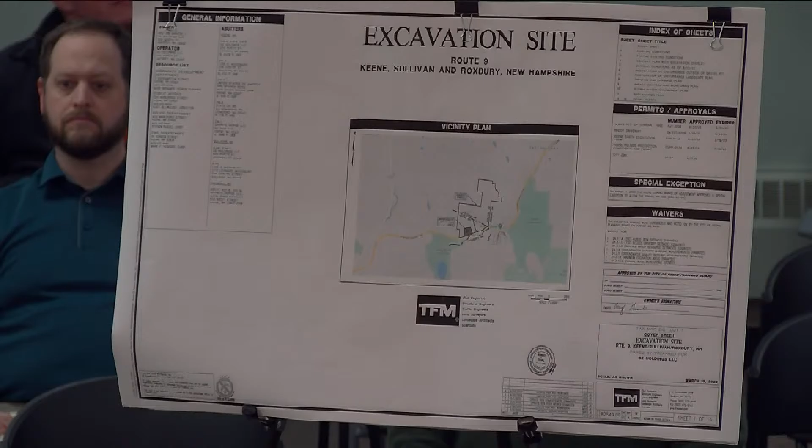They've started, they have a landing area, and they've brought material in from other places to store because it's a nice wide landing area. They're not allowed to remove that material, and rightfully so. They're not allowed to be up there operating. But they have all this material brought in from other sites that they basically can't get at this point. So there's some ability for them to operate their business and allow an engineer to work it out outside of the board. That's kind of what we're requesting tonight and seeing what you guys would be willing to amend.

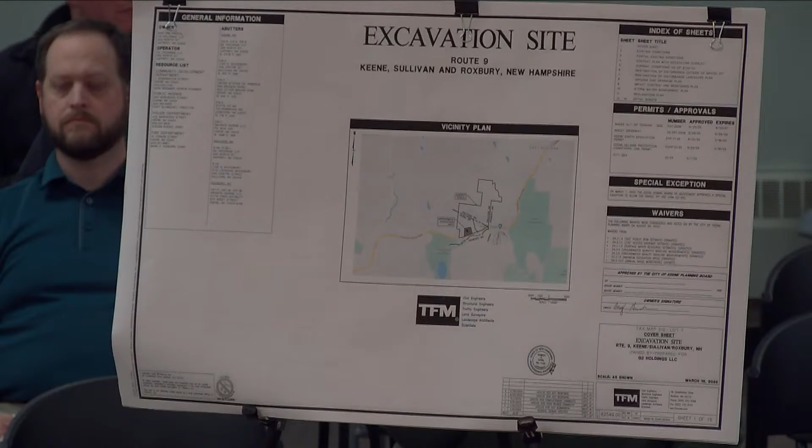Madam Chair, may I interject? Yeah.

Under the planning board's regulations regarding extension requests, an extension is only allowed to be for the plan that was conditionally approved by the board, with no amendments to it. Unfortunately, what's being proposed tonight is not allowed under our regulations. Specifically, it says that no modifications to the approved or conditionally approved plan shall be considered in conjunction with a request to extend the deadline. However, if the applicant wishes to, after receiving the extension, they could come back at a future meeting to request a modification to the approved plan.

Sounds fair. Thank you, Mary. Are you all set with your presentation, both of you?

It would be advantageous to at least know how you felt about that, just so it may prevent us from coming back here, or it may allow us an opportunity to talk about something different. I don't know if this board has the ability tonight to talk openly about the possible amendment and what their concerns may be, or how we could word it. I don't know if staff could weigh in on what their abilities are.

So I would recommend that you keep your discussion tonight just to the extension request, and come back at a later date with the amendment. Thank you. Do any other board members have any questions?

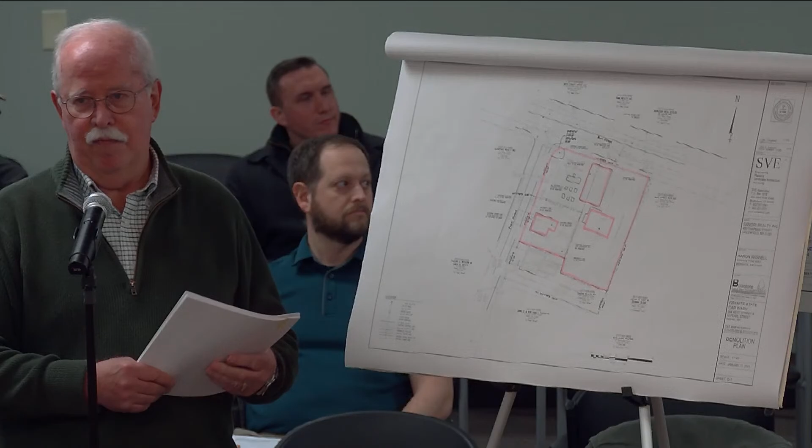This is going to be a good effort to clean it all up. Proposal is to tear down the single-family house, tear down the detailing shop and the canopy, remove the underground storage tanks, which I think most of them have been removed already, and then to merge the two properties. When they merge the two properties, we'll end up with a single lot, 0.61 acres in size, in the Commerce District. And this is just a colored version of the proposed plan that's in your submittal package.

We are proposing to eliminate the existing curb cuts that are pretty wide open all along the West Street frontage. And we would eliminate a curb cut here on Pearl Street, and we're eliminating a curb cut to the single-family residence. We would replace all those curb cuts with a single curb cut on Pearl Street, located about 125 feet back from the intersection with West Street.

We see that as a tremendous improvement safety-wise. You're no longer going to have cars entering and exiting the property at West Street, so that's going to reduce the potential conflicts, especially with left turns crossing 2 or 3 lanes to get in to go to the west. On Pearl Street, by consolidating those 2 curb cuts into one, we'll have a single access point that's much easier to control, much safer to control for the customers who are proposing to use the property.

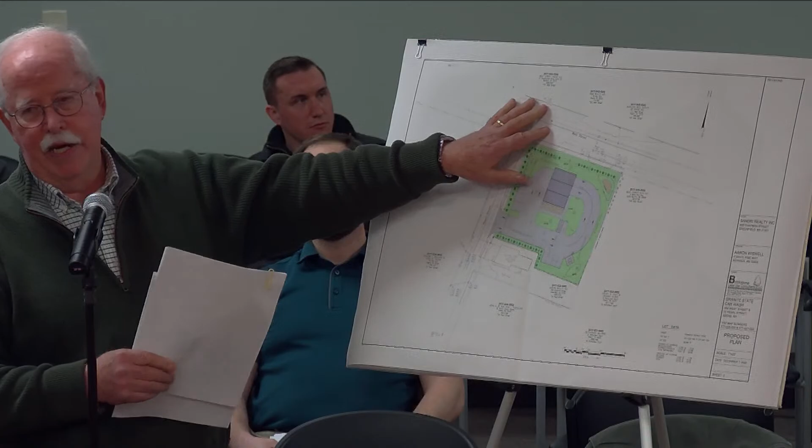So what they determined was the existing intersection today operates at level of service E, and that's no surprise, so it's near failure. Many of the intersections along West Street are that way, and that's what you get when you have the heaviest traveled street in the city. Intersections approaching that end up with long delays during peak hours before they can enter, especially to do left turns. And the longest delay that they measured during their 5-day period was a little over 2 minutes for a car on Pearl Street. It started waiting in a queue, and it was 2 minutes and 5 seconds before it was able to get to West Street and turn left. So that's why that level of service is so low, an E.

We looked at the traffic that would be introduced by a new business at this location, and we didn't subtract or try to balance based on the old gas station use. We looked at this as a vacant lot and a new use, and the number of vehicle trips that would be generated during the peak hours by that use. The numbers aren't high during the week. The highest number of trips generated would be on a Saturday midday when most people aren't working and they can take time to go out to try to wash their cars. They looked at 61 vehicle trips during the peak hour. That means 31 vehicles turning into the site and 30 vehicles leaving. It's not 61 cars, it's really half of that number.

So the car wash technology has changed tremendously, even in the last 5 years. I've done a lot of car wash site plans, most recently Mint Car Wash down on Lower Winchester Street that I think you're familiar with and may recall. They now can wash a car in about 4.5 minutes, which is much faster than it used to be in the old days.

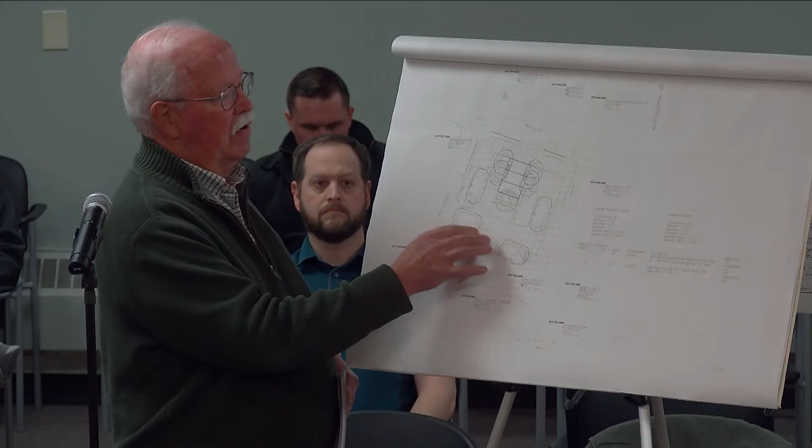We're proposing 4 overhead lights that would be located on 15-foot poles, so they're not really high, like a lot of commercial shopping centers, for example. Most of those light poles we use are 30 feet high. These are 15 feet high. And we are using very low wattage LED fixtures. Because of that, we end up with really low light levels.

When we do a lighting plan, I work with a lighting engineer out of Manchester, Ken Sweeney is his name. If we have a lot of pedestrian activity on a commercial site, then we end up with higher light levels because of pedestrian safety. If they have to step over a curb or go up steps to get into a building, you want adequate light. And it's a liability issue for property owners to make sure we're addressing light levels appropriately.

So here, because you arrive in your car, you stay in your car to get through the car wash tunnel, you may exit your car where we have the 2 vacuum stations located. But other than that, you're back in your car the whole time. So we can live with much lower light levels.

The average light levels that we're proposing here, instead of 4 or 5 foot candles, we're proposing light levels of 1.12 foot candles and 1.32 foot candles at the vacuum station where they're getting in and out of their cars. So it's already a very low light level. And I don't know how many of you are familiar with foot candle readings. For example, in this room, I'm gonna guess the lighting levels are probably 30 foot candles under these lights.

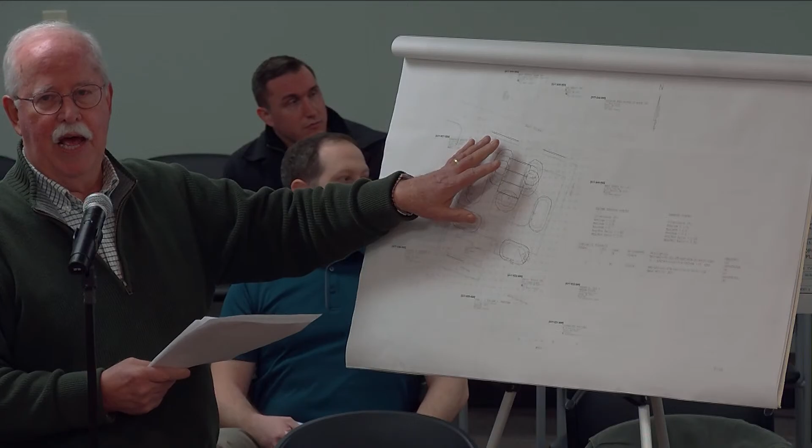Your regulations, this is proposed to operate 24 hours a day. And because of that, we have to leave the lights on. And we purposely created the low light levels, as I explained to you. Your regulations say if you're a 24-hour business, we want you to reduce the light levels by 50% after 10 o'clock at night. And we do not feel that that's safe or reasonable because we're already down very close to 1 foot candle. To reduce it to a half a foot candle, I think is unreasonable and causes an undue risk for the property owner and tremendously increases his liability.

A lot of the properties that I've worked on, I've helped to manage for about 15 years through a property management company. And there's repeated lawsuits on commercial properties over the years, and we learned the hard way. And most of that involved slip and falls or tripping on the property. And it always came back to, was there adequate lighting at the areas where they were stepping down? Is that what contributed to the slip and fall? And regardless of how hard I argued that we had an approved plan that met the Illuminating Engineering Society guidelines for lighting, the insurance companies always settled.

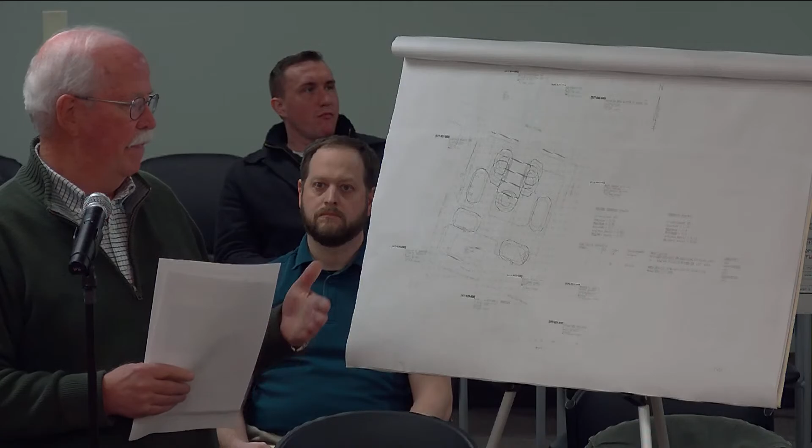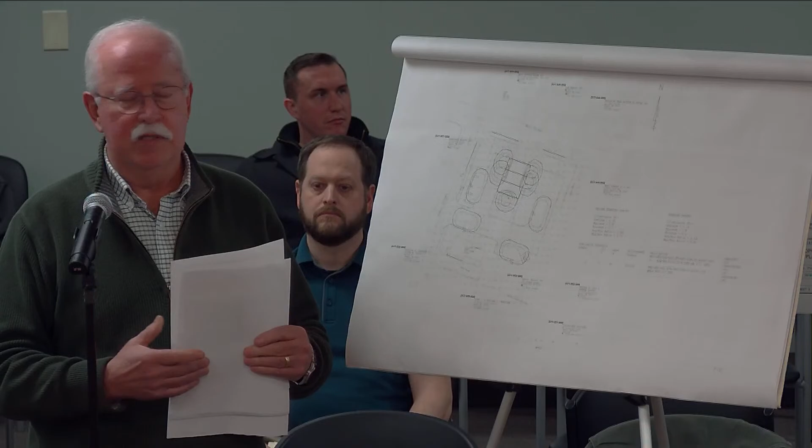So lighting is a big deal for commercial properties. And so I'm stressing that to you, that we don't want to lower light levels below 1 foot candle because it introduces an unreasonable risk for the owner. So I requested a waiver to let us leave the light levels. We're nearly at 1 foot candle already. And a lot of times, at a shopping center, we're going from 5 foot candles down to 2 foot candles. So this is already way less than that. So I think it's a reasonable request, and I hope you can support that.

I had discussions with staff about screening. Because drive-through lanes are intended to be screened from public views and from adjacent properties, we're using 6-foot solid fencing along the southern property line and along the eastern property line. This includes, part of this fencing is owned by this property, and part of it is the Aroma Joe's fencing, which is also owned by Aaron Wiswell and his partner. So they own both of these properties, and they're managing both of these properties.

And I just want to make a comment here. I don't know if you've been observing the construction of the Aroma Joe's. It's a very small lot, but it's one of the cleanest construction sites I've ever worked on. I'm just amazed at how good a job they've done of keeping that clean, keeping it organized and safe.

And I think it shows you what a good job these people do taking care of their properties. They own 105 Aroma Joe's. And I don't know how many car washes they own, but they own dozens of car washes in New Hampshire and in Maine and in Florida. So these people are very experienced, and everything they've shown me is they do a great job. So I'm not worried about fencing being maintained on their properties. I know they'll do a good job of that.

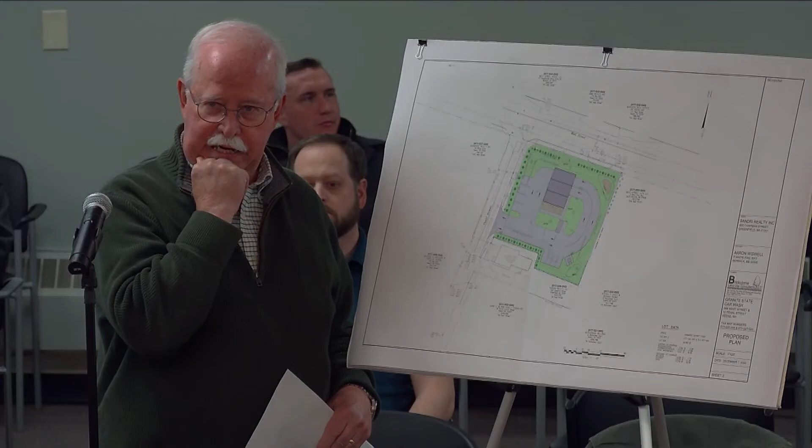We're now collecting stormwater on the property. We have catch basins connected with perforated pipe laid in stone, infiltrating into the sandy soils that exist on the property. Excellent drainage here because of the sandy soils. And then we also have an area here, which is a stormwater basin for overflow from that system.

And an additional infiltration area. At the front of the property, we're sheet draining to allow stormwater to pass through the grassy areas into a swale that will collect and deliver it to an infiltration area here at this corner of the property. So it's a tremendous improvement over what exists, and it provides these collection areas on-site rather than directing it into the city right-of-way.

The vacuums, concern was expressed by staff. We're locating 2 vacuum islands in these locations. Each vacuum can support vacuuming out 2 vehicles at the same time. And so 4 vacuum spaces that are serviced by those 2 machines.

And these are the machines, you may have seen them. I don't know if there's any in Keene this way, but there's an arm, an elevated arm, and the hose hangs down. And that allows you to lift it over the car and clean both sides, rather than try to drag it through the car or around the car. Works much better for the people trying to vacuum their cars.

There was concern about the noise levels. One of the reasons we located them here and not at an area in the back of the property is, these are residential uses. Even though all this area around this site is zoned commerce, there's still residential buildings that front on Richardson Court, which is located here, and then down Pearl Street. So we felt we'll pull it back here, closer to West Street. This is not a residential use across the street, and that would kind of confine the noise to that end of the property. Then we'd use the plantings and the fencing to help buffer that noise.

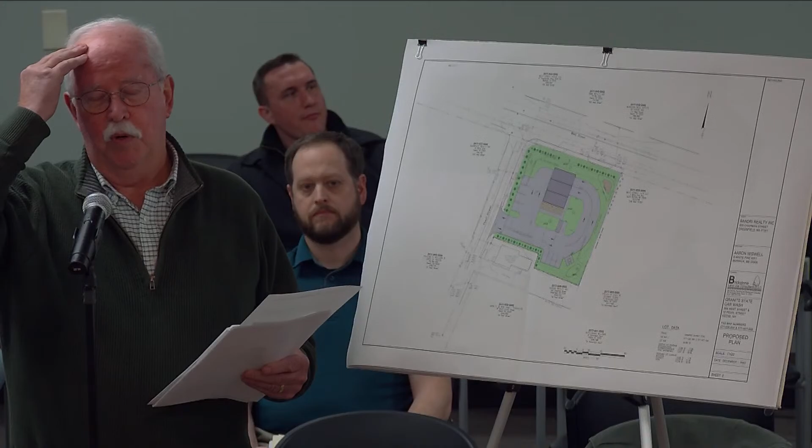Regardless, I use the 100 number, and at 35 gallons per wash, that's 3,500 gallons per day, which is not a big water user by commercial standards, and there's certainly plenty of capacity in the water system. We're going to be utilizing a water main on Pearl Street, which is a 16-inch main. That's a huge water main with plenty of capacity. And the residual pressure in that main is over 90 pounds per square inch. So there's plenty of capacity.

It'll be a 1-inch line that'll come out and service inside the building. And the way they can get away with using a 1-inch line, even though they're operating a car wash, is there's also a water storage tank inside the mechanical room. So all they're doing is keeping that tank full, and the tank is what's feeding the washes. So there's not a need for a 2-inch or 3-inch water main to come into the building.

Filling and excavation: all the soils on site are excellent, good sands, and as you go down deeper it's gravel, so it couldn't be a better situation to support the building. There's no basement under the building, so they'll just be excavating for the foundation and hauling in gravel to support the paved surfaces on the property.

It works out to a little less than 300 cubic yards of fill to be hauled in. There will be truckloads of debris hauled out when they tear the building down, but the demolition contractor is going to salvage everything he can out of those buildings, and the rest will go to a construction landfill, which grinds up the wood and recycles that material.

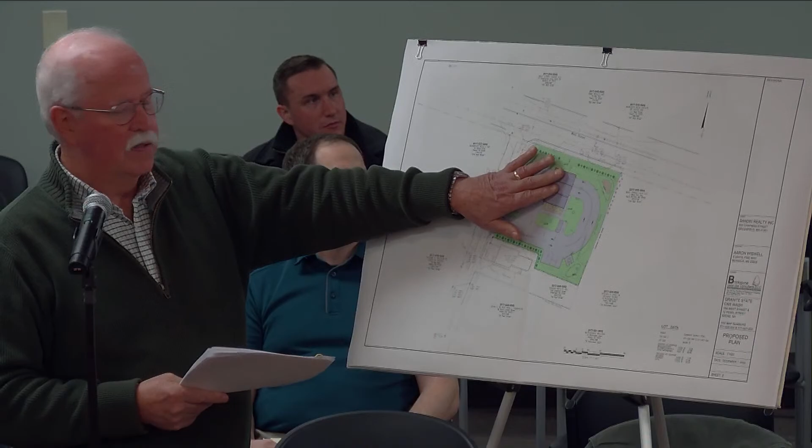Doing the math, if it's 4.5 minutes per wash on average, then we're looking at 13 cars in an hour per tunnel during the peak hour. So that's 26 cars entering and 26 cars exiting, which gets you up to 52. And if there are 61 during the peak hour, and they hope there is, they're left in the stacking lanes, and there's more than enough room to stack the additional cars during that peak hour.

The traffic engineer looked at queuing on Pearl Street, and I submitted the traffic report, which you should have a copy of.

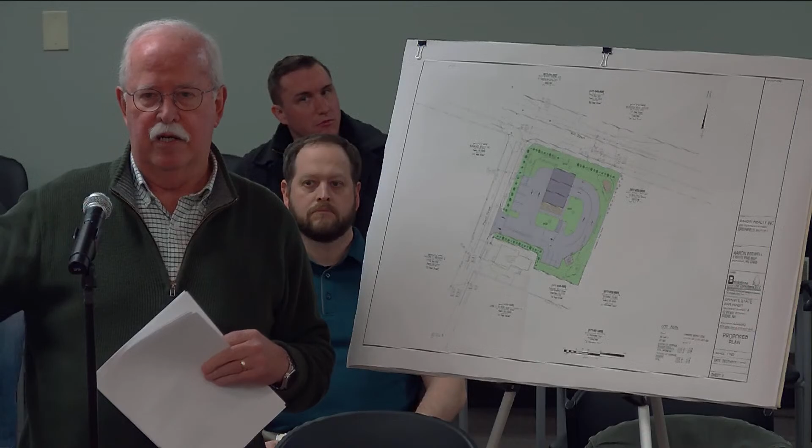It's a 30-page document from Stephen Pernaw and Associates, a very experienced traffic engineer. I've done work with him for 15 years.

I told you they had video cameras set up to monitor queuing on Pearl Street. There's no queuing on West Street since it's just a throughway. Here's the intersection, and the most frequent queuing was 2 cars, with the worst being 5 cars during their review. This is 125 feet, so queuing would extend all the way down to this curb cut location. This is as far away as we could get it while still meeting the 3-foot setback needed from this property line.

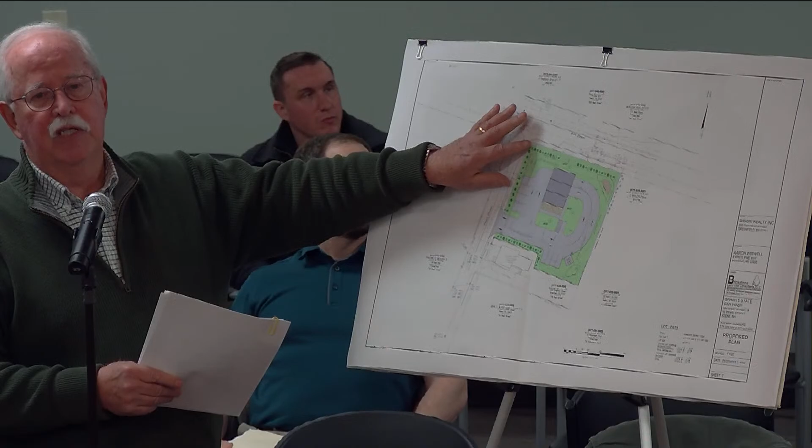So he felt this would work even under the worst conditions. He made a recommendation, though I don't know if staff wants us to implement it or if it's necessary. He recommended posting signs asking cars on Pearl Street not to block the intersection with the driveway. I think Pearl Street is the most important factor here, not the entrance to the car wash, even though that's my client's entrance. Whether people would comply, I don't know. But even under the worst case, according to the traffic engineer, 5 cars was the worst witnessed, and on average it's usually just 2 cars. So I don't think it'll be a major problem.

Thank you. Are there any other questions?

Yes, there were a couple of letters given to me by staff today that I'd like to address. The first is from a woman, Ann Kramer, who listed 7 different issues.

She was concerned about 50 gallons of water being typical wash water to wash one car, but it's actually 35. She was worried about it going into the city storm drain system, but it doesn't—it goes through our collection system, is treated, and discharged to the sewer system. As for potential impact on the Ashuelot River, I think there would be an impact if we were discharging into the stormwater system, but we're not, so I don't believe there's any issue. The Ashuelot River is about 400 feet to the east of this location.

Air pollution caused by soap and wax residue—I'm not sure how to address that. I think of soap as clean and good. I don't know, maybe somebody's allergic to a scent in soap or something. I'm not sure what this is about, and I don't know how to answer that.

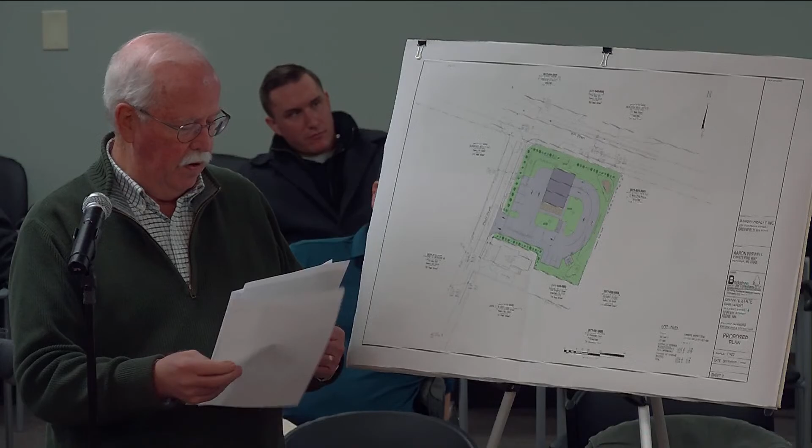The second letter is from an abutter located here, Stephen Cady. His greatest concern is about the lighting, and I think he'll see a tremendous reduction in the amount of light he sees coming from that property today. What we're proposing is a far, far lower level, so I think that'll be an improvement.

As for noise, shutting off the vacuums at 8 o'clock at night should hopefully mitigate that adequately.

They're worried about the property value on their house. If you live in the Commerce District, you're going to get commercial uses around you, and that doesn't necessarily lower the value of your property. Some people would feel it makes their property more valuable if it's in the middle of a commercial area being redeveloped as commercial. Then there's a different market - instead of looking at it as a residence, they're going to look at it as a commercial property.

He's worried about traffic at the intersection with Pearl and West Street. I think I've addressed that.

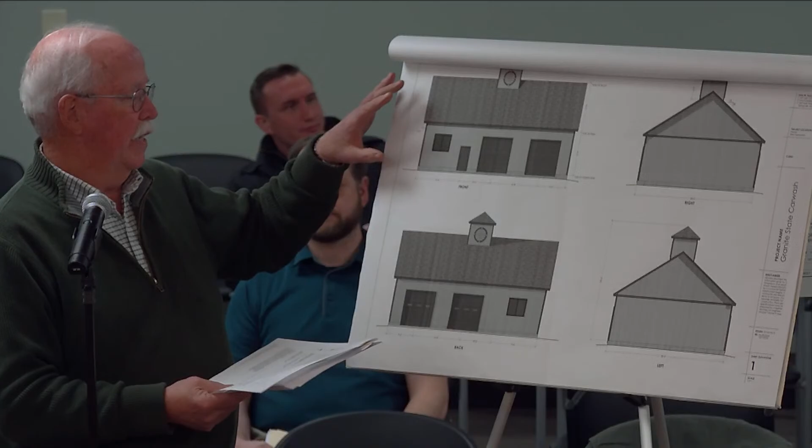I guess he thinks the building is intrusive and unsightly. I think as car wash buildings go, this is one of the more attractive ones that I've ever seen. It's the typical peaked roof design with a cupola. Especially from a distance, you look at that, it looks like it fits. It's not a flat roof plastic building like some car washes are today, so I think this addresses that issue appropriately.

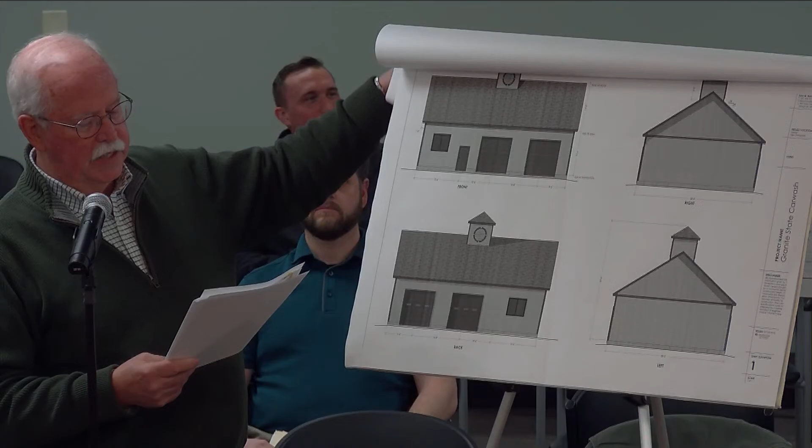And finally, the 6-foot solid fence, I did address that. Our fencing is new fencing which covers the extent of his property, and it meets the Aroma Joe's fencing, which they also own and will maintain. So I think that's adequately addressed as well. But I don't know if he's here tonight, maybe he has more to say.

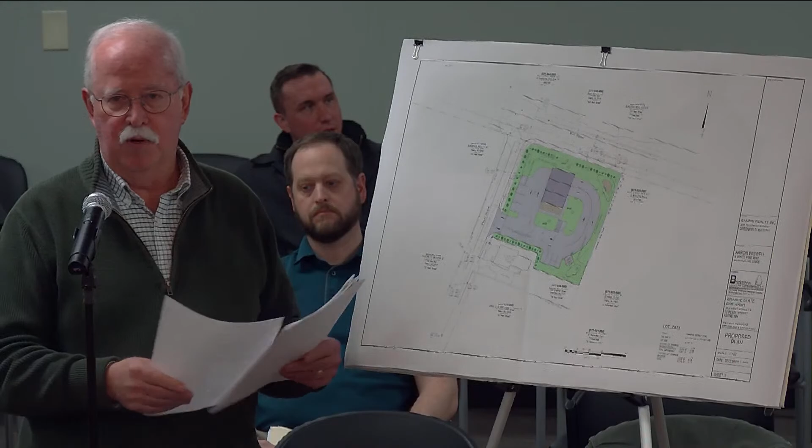And if there's no more questions, I'm done.

Jim, just for the record, what are the hours? It's open 24 hours, 7 days a week, but the vacuums would only operate from 7 a.m. to 8 p.m. Okay, thank you.